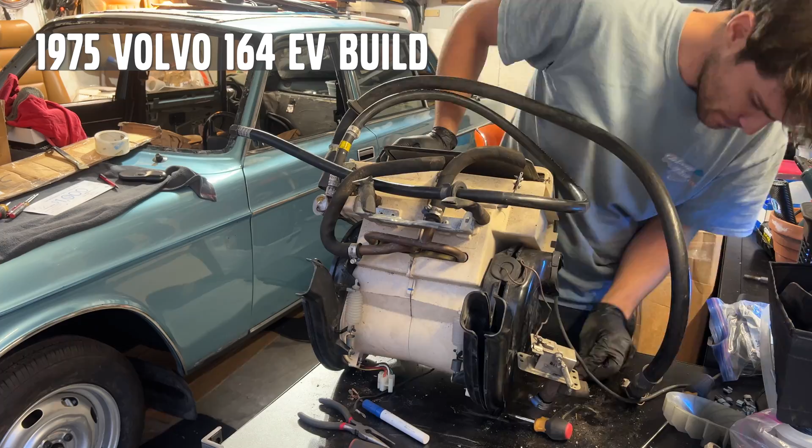Inside here is a wheel with a little washer on it. In the center of the washer is where the motor mounts, so you can push it to either side to get it to unmount. There are little nubs where the ends of this can fit, and it's flat, but it's gonna be under pressure when you press it down over the shaft of the motor. The important thing is to mark the shaft relative to the plastic wheel, just to make sure it stays in balance when you put it back, so you don't prematurely wear those bearings.

This is a big job. This heater whole thing just has to explode. Good luck. Look at that, 79 pieces. Ugh, and all these steps are like so easy.

Just right there, remove the heater unit assembly. And then a few notes on testing the blower: separate the blower motor housing halves, remove the blower motor. Sounds pretty straightforward, but then you're like, how exactly do I do that? So this is where trial and error comes into play.

The 240 housing is very similar to this, but I think the hoses for the heater core are actually on the other side, and people just cut it open and replace the heater core that way from the top of the dash. This doesn't give us that option.

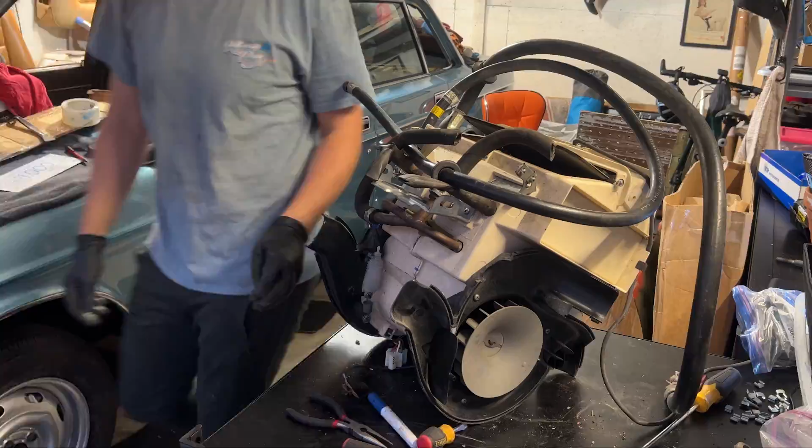Originally, my plan was to redesign this entire HVAC system. The biggest challenge to that would be this gasket at the bulkhead. It's largely rectangular, but the taper and everything. I feel good about reusing this, but I know it's going to be a bit of a journey figuring out how to put it all back together.

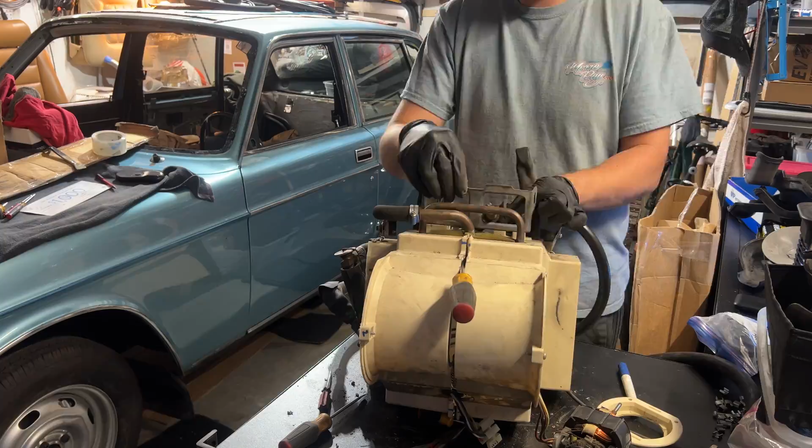Now that the halves are separated, this should, in theory, just come apart. And there's our heater core stuff here. Is it perhaps glued together a little bit? I can't tell you, I'm struggling to figure this out. I think it's just glue.

There we go. All right, the magic of editing, it looks very easy, but I'll tell you, this was rough.

So there's our little motor. Sounds pretty good, a little squeaky, but the bearings don't have any wiggle in them, which is awesome. That means we can oil it, check our brushes, which are looking pretty clean, and end up putting that motor back in.

Cool beans, this is what I'm after today: this lovely heater core. We're gonna take measurements of this. It's going to go in the computer, and the computer will tell us what size electric heater core to purchase.

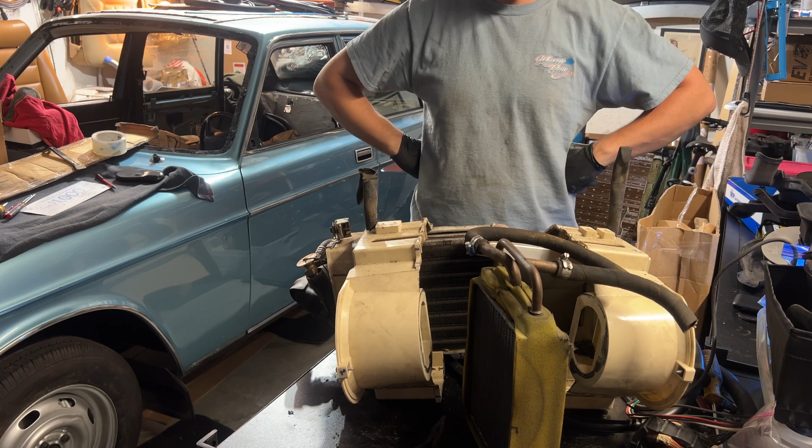An electric heater core is not gonna get too hot. Yeah, it's 1500 watts, which is the same power as my heat gun, but I think with the fan blowing, it should be about the same. We're gonna target the same temperature as whatever the heater core gets to be, that way we're not overheating this entire assembly, because I would love to have a more or less Volvo functioning setup, where you can just turn on the heater and it'll trigger through the switch the electric heater.

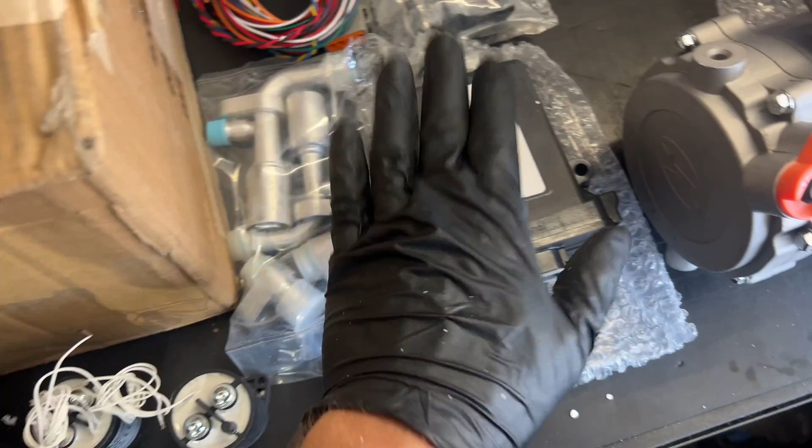This is where one of the ports will go. We have our adapters here so we can get these fittings made and compressed. Very nice, it does come with its own control module. The good news about that is this will be going to our high voltage system, which is exactly what we want. I gotta confirm. The other thing that arrived today is our tiny little heaters.

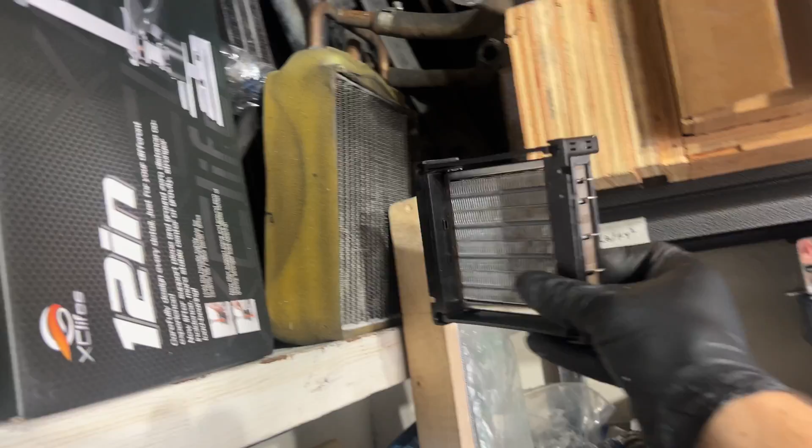Look at these guys, about the size of my hand really. So let's compare this to the Volvo heater core. Gosh, it looks like we could almost fit 4 of these in place of our heater core, but we're essentially going to do one and two like that. Bada boom, it should roughly be the same size.

We might need to cut a little bit around and then create some sort of mounting brackets for these. I like that they have a plastic enclosure because that tells me they're not gonna melt themselves, because boy, do they get hot. 1500 watts these things are gonna be running.

So I sent the second motor out to get that modification made. They're doing like a 5/8 drill up the input shaft to make it fit the Volvo input shaft. And they said they've never had this much trouble with couplers before, but sometimes zeros and ones get flipped. Decimal point is in the wrong spot.

And measurements are not an exact science. Human error is not an exact science.

Okay, well, we've got tiny little baby contactors for these. The same kind of contactor arrived for the air conditioning compressor. I'm going to open up the second box, make sure all the parts are identical. And we have 2 high voltage compressors ready to go with our 120 volt system.

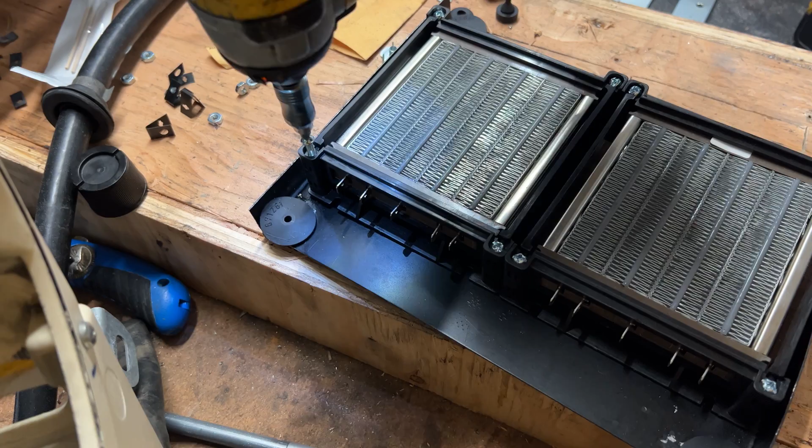Heating elements are secured. I have these little bumpers here on the bottom because there is a slope inside of this where the heater core would like to cinch up against the ends. We have 5 terminals on these, it just goes 1, 2, 3, 4, 5, 1, 2, 3, 4, 5. So it'll just be like heater core 1, heater core 2.

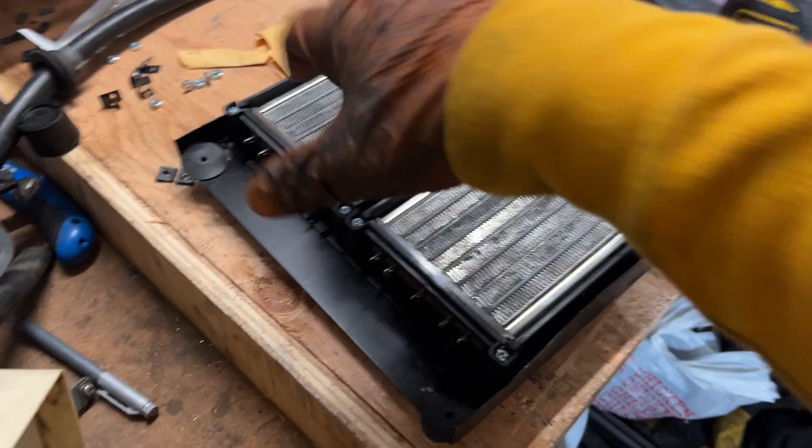AC compressor time, low side is 21.2 millimeters. Hey, didn't have to crack open the seal after all, because those guys popped off and the rubber stayed in. It's really held in with a lot of vacuum, so voila. Our top one here, the orange, was the high side, the low side was blue. A couple of things I'm noticing as I'm going over the kit, now that I've labeled the right ones, high and low, we've got 2 sets of fittings.

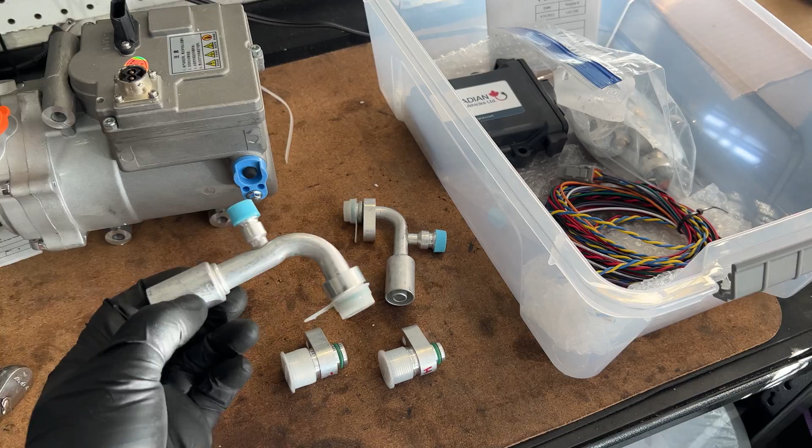This is a screw-on type. This looks like the old R12 style York compressors. And then this modern looking one, which I'll have to get pressed at a shop, like a machine or a hose fitting place.

And as we're back under the hood, there's a real order of operations to this, and I just can't work out of order. So I was getting pretty deep into the air conditioning stuff, and now I'm like, man, I can't really find out where to put the AC compressor.

I don't want to create mounts for it and then have it be in the way of the motor and battery box. We could very nicely mount the AC compressor over that side and the battery there. So I kind of want to keep that area clear, because I like how this looks, very nice and smooth with the fresh paint.

So this is going to be all wiring here. I want to have a minimalist appearance to this because we are trying to be artists as well as engineers on this project. And boy, it's tough.

So I'm going to start taking measurements for my fabricator, which is Soren. We still work together even though we're 800 miles apart. I'm going to send him the mock-up template of the mount, and then he will get to work welding out of some heavy gauge steel. In a minute, I'll take you inside and we'll talk air conditioning theory and setups, etc.

Pieces we're going to need. I'm going to show you now the clearance we have in the engine bay for the condenser, and we have to make space also for our cooler for the electric car. So it's like the radiator for the controller system.

The cooler we're going to be using for the electric components is the Derale Performance Electra-Cool Remote Cooler 15800. The specs here are not correct, the dimensions are different than this, but that's close.

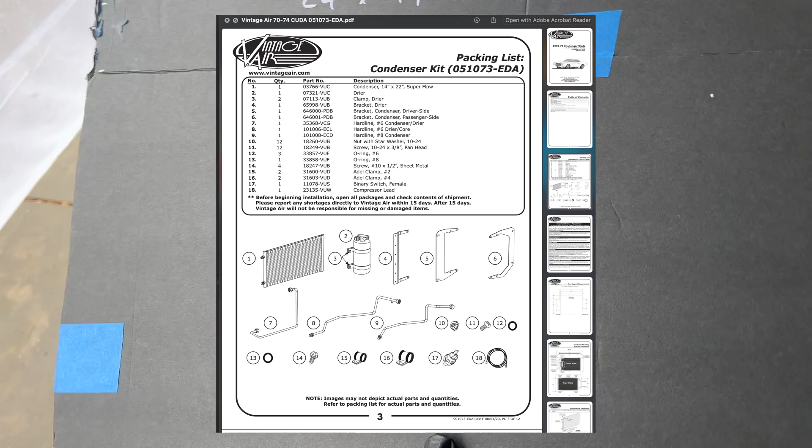As I'm shopping for condensers, I looked through maybe 60 of them, and the kits from a condenser on its own for like any sort of 60s car that already exists is pretty cheap, 60, 70 bucks. But the kits are what I'm looking for, and the kit is stuff like Vintage Air, where they'll have a condenser and it's black, so it actually hides behind the grill better than the silver ones. And those are mostly 2 sizes, like 24 by 14 or 22 by 14. There's a few 12-inch ones, and there's even like a few 20 by 12, which I think is like universal application, but this is like the most common size.

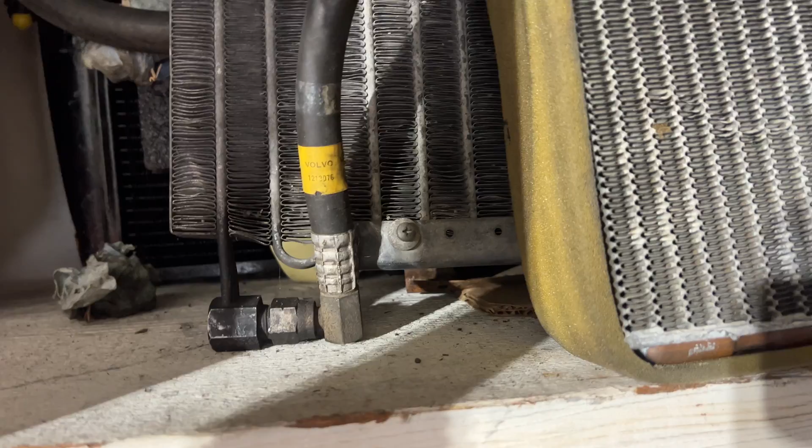The original Volvo condenser in the front there, it's 24.5 inches wide, which is exactly the end of the mount to the end of the mount, and it comes all the way to the end there. A lot of the condensers online, the measurements don't include the fittings, they're just the body of the condenser, so we got to keep that into account.

It's 12 inches in height, so I was trying to match something like that. The Mustang gets close, but it's still 14 inches in height.

The radiator sits behind the condenser there, and also behind it in the engine bay, closer to the engine. 23.5 inches is the body width, but then there's the ends, which are like 1.5 inches each. The total width of the radiator mount, bolt to bolt, is 27 inches.

And the height of the radiator is about 18 inches, but it sits 1 inch higher than the cowl. If we went all the way to 18 inches, we'd be about as high as this P-clamp. This P-clamp has a different name as well - an Adel clamp, I think they call them. I learned that last night.

Anyway, the opening of this mouth is 24.5 inches, that's that wall there with the 2 screw holes. There's 1 screw hole and 2, all the way to this screw hole - 24.5 inches, the same as our condenser size. Of course, it's made to fit.

And the opening is 14 inches high, and that's from these bolts down here all the way up to the latch. But 14 inches is really butting up against the latch, so if we put something in that's 14 inches, it's going to be crushed by the force of our latch pushing into the spring. So we want to keep clear of that.

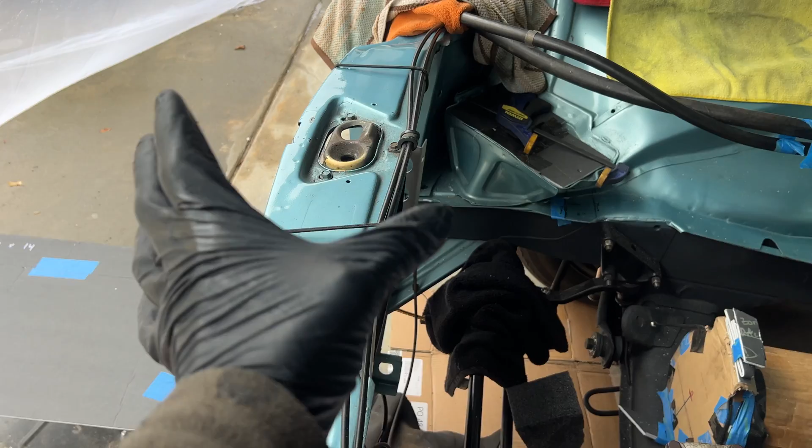A lot of American cars are big cars, so they have the latch really far forward, and there's a lot of space for condensers to be added. But Volvo made it compact and they fit it, so the good news is we don't have to redesign and keep the radiator, because there's this 4-inch notch that's cut out here on the frame rail, and cut out here along the lip of the frame rail. That will give us the room that we need to mount our 24 by 14.

Lately, my life has just been this: measuring, drawing, measuring, drawing, measuring, drawing. At some point, I'll go upstairs and get more paper, but 24 by 14.

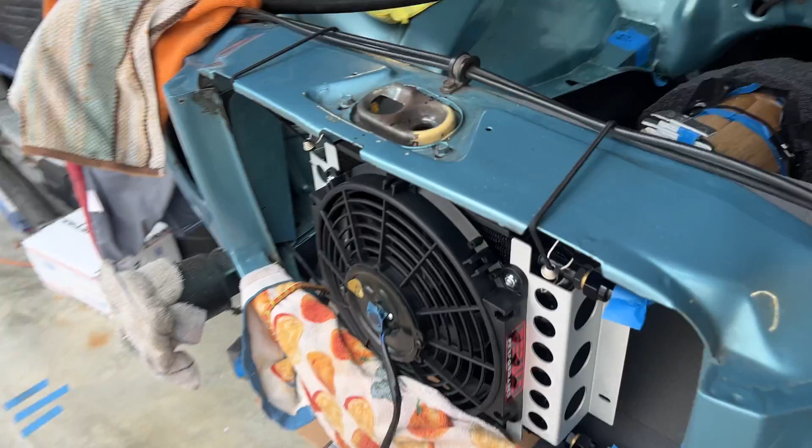The condensers, most of them are about 0.86 inches thick, so they're not that thick, which is really great. Very slim, very compact, and instead of being the old tube and fin like this one, where it's just a single tube that runs, and then it zigzags up and back down and back up, it's a more modern parallel flow type. I don't know if this one here is the same thing. I hope I'm getting all my facts right.

And as such, they need to be mounted completely vertical. So our EV controller cooler is kind of where I think it's gonna be now, which is on the inside of the mouth, because our larger condenser can fit right where the radiator wants to take place. And I'm hoping to find a kit that has the brackets mounting to the sides, because a lot of them will mount top to bottom, and that's fine too.

We've got those 2 bolts at the bottom. And we could mount into the top, but I don't want to share any holes or create new holes with the latch, because I need to keep the adjustability on that. Really, the best option is to do side mounts and maybe a bottom one if we need to, but the side ones should be adequate.

And then I'll have to bracket this guy differently as well. But from here, 24 by 14 fits. We have a half inch to spare on either side, and the height, it can go all the way down until we hit the brake line. So you can see the bottom mount for the radiator down there is essentially the 17-inch mark from there to the top. So we've actually got plenty of space for a 24 by 14, which is really awesome.

The next thing to do is bracket it, because a lot of the kits that they sell, the brackets come and they attach to the top screws. There's very few that have side screw holes - they're all top and bottom screw holes. So I'm gonna have to keep it a little bit lower like this to make room for the brackets, but I'm feeling pretty optimistic about that.

Now the next thing to do is the fittings. The ends of our condenser will have these 2 - it's like an 8 and a number 6 AC line. It'll be top and bottom, and they're gonna have hard lines or soft lines that'll come out, wrap around. So we want to keep this a little bit over to that side to give room for the lines.

Or another option, but I don't really want to do this - there's a smaller brace on this side. You see there's a hole there and here for the AC lines. On the Volvo condenser, those holes don't exist on that side.

And these holes could be used to get access in here and then drilled out to this side. But I don't want to have to do that, because I'd really like to put the receiver dryer right up here against the condenser. That'll also be out of the way of the battery box, but it's going to be nice and compact. A lot of the vintage air systems have the AC dryer sitting on the front side of the condenser, so if I can pivot some of those hard lines, or maybe even bend them if I have to, we can get it to mount on this side.

So right now the Mustang kit is looking pretty good - 64.5 to 66, all the way up to 69. One or two lines changed, but the bracketry is the same, and the condenser is the size we want. If I have an option for a 22 by 14, I'll do that as well - it'll have a little more wiggle room and space to get the lines to clear as we wish.

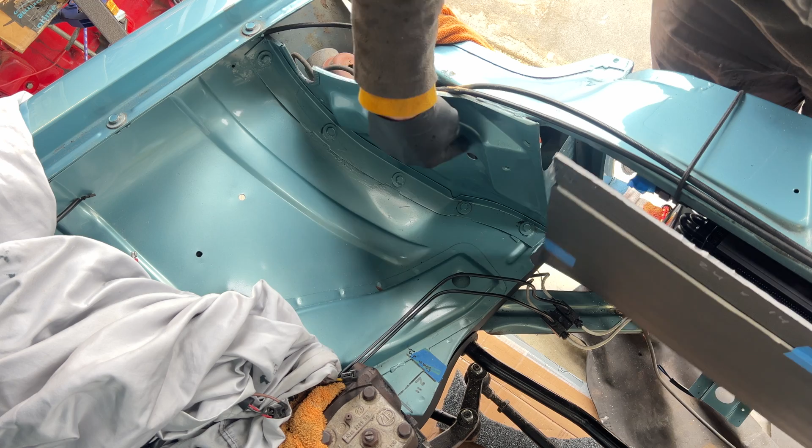This is the space where the power steering reservoir curve is, and this was the curve that held the coolant overflow tank. But it's also a really good spot to mount our AC compressor, and it'll keep it nicely out of the way like that. Now this has a bracket - it's in the mail - but it's going to attach here, the high and low sides, and if we can curve all the hoses correctly, it should be a nice short distance to all our AC parts for the condenser and the receiver.

The important thing is to keep the compressor vertical. That's the way it's designed, and that's the way the oil functions in it.

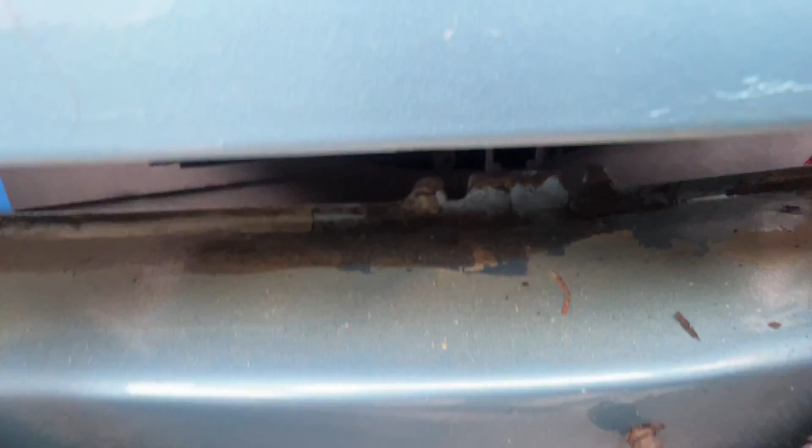The grille's not terribly big, and they shrunk the front of the late year 164s versus the early ones. So you can see this bar that was added. This bar - the bumper is going to sit up here - and then the bar is for the smaller plastic grilles versus the larger metal grilles. But the larger metal grille bar still has the attachment point down here - see those two? Anyway, that's kind of our centering point now.

But if we put this in here, it might sit a little higher, but not too high that it gets in the way of the latch there. This is going to be a pretty good spot to cool our fan. But I can also get it through this side and out through the air hole on that end. This is the breathing spot for the D-Jet system in the B30's intake, but that will require a little more cutting on that side.

So I'm going to start with plan A. It'd be kind of fun to keep all our components on one side and leave this part of the engine bay nice and clean. But I don't want it to be too one-sided or too heavy on this end visually - but sometimes you just work with what you've got.

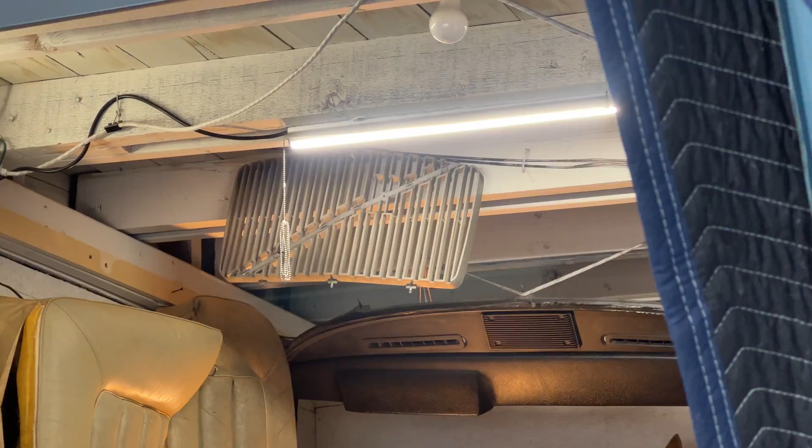There's our grille, the plastic grille. This isn't the exact one we're going to use, but it's one of them. There's our TE grille - you see it's got 3 plastic nipples at the bottom, and it's got the 3 screws up top.

So it's going to sit about as far as this plane here, which means this is going to push in just a little bit. With the curvature of the grille, this will get close but should be just clear of everything. Plus, our condenser is going to need its own set of fans on the backside, so we'll have a total of like 3 fans working this whole setup - that's going to be a big deal.

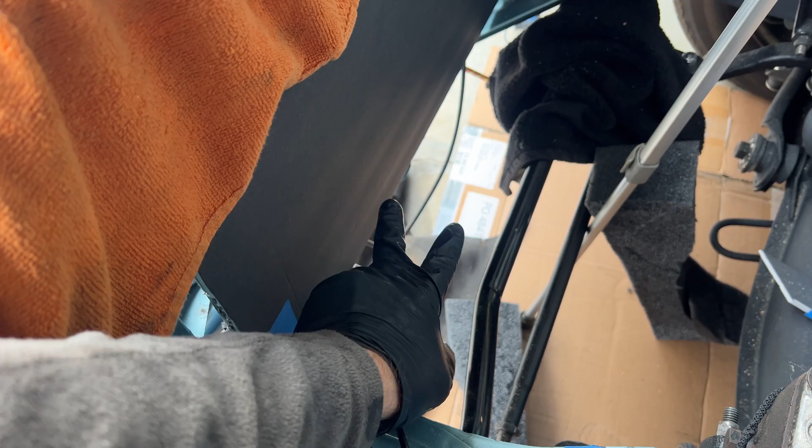But whatever we get, we want them to be small because we only have about 4.5 inches from this top part of the cowl, or the radiator support, to the battery box. So we'll be putting in some slimline fans, and we'll also have a little more space at the bottom. If this wasn't going to fit, we could also slightly tilt the condenser, since the battery box is slightly tilted - but I don't think that's going to be the case here. The Corvettes had tilted condensers and they looked pretty cool doing it.

So as I was describing here, I went through 6 pages, 150 different kits, and I checked every dimension.

I'm really grateful that we have access to parts like this. Vintage Air is amazing because they carry all these great custom components, but their website leaves a little bit to be desired. Clicking on Mustang and trying to find the condenser kit just gives you part numbers for full kits, and none of these are actually links that you can click.

If you copy paste the number or just use their search bar and type in Mustang, you've got all the options here: shrouds, hoses, etc., but full kits as well. For about 315 bucks, you get a full Mustang kit, and the nice thing is you get full detailed instructions covering every part, its number, and its dimensions. Here we have the condenser, 14 by 20, which gives us 4 inches extra room.

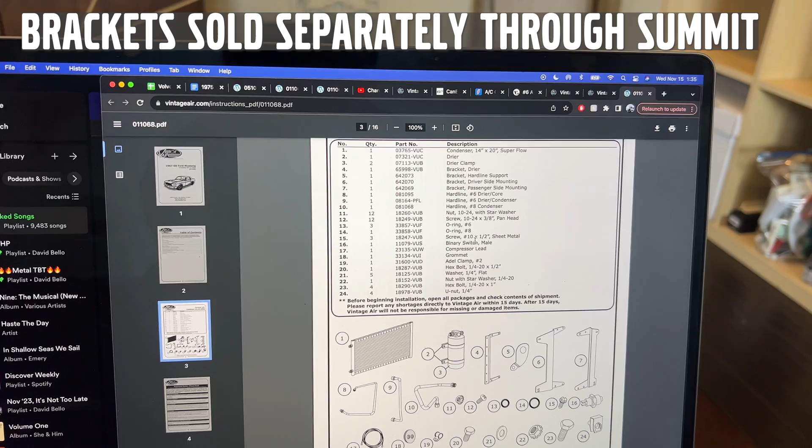You can come down here and look at the bracketry they have. I don't think they'll sell you the brackets individually unless you call and do a direct order, like if you damaged something from a kit, but it's nice to know it's all documented here.

The condenser changed very little between the Mustang years, but some other important dimensions here: they're showing a 24-inch opening. That's what we have, 24 and a half, and 21 and a half for the mounting holes.

Some views once the things are installed, so we can get creative with the brackets because this is coming out. This is the rear view. I like that one. But sometimes it's reversed and it comes out the passenger side, and the diagrams are very useful here.

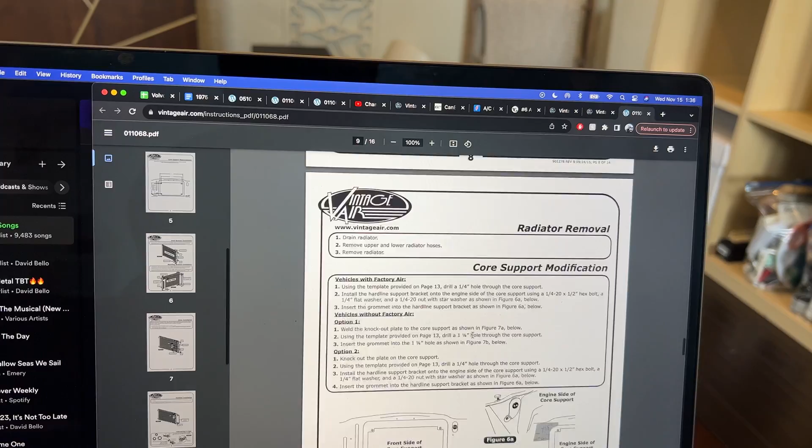So I went through a couple of notes as I was shopping through 150 different kits, checking the measurements on each one and going through the diagrams, coming up with my favorite 15 options. We have everything from Chevy pickups, Corvettes, Barracudas—mostly Mustangs made the list because they're 14 by 20. Some are 16 by 18, but 14 by 22 is what I think I want to go with, which is the Barracuda.

339 bucks. So when I found it here on Summit, I would just Google this, and that brought me over to Vintage Air's direct link for the product. There I could get some of the instructions, plus figure out their MSRP to see if there's a better price available. The Cuda has a condenser that is 14 by 22.

I like that because one of the other beautiful things is not all diagrams are the same. They don't all include this engine diagram, and sometimes they have more or less realistic photos. But here, the important thing is they're including this: the binary, sometimes trinary if you're using an electric fan, safety switch.

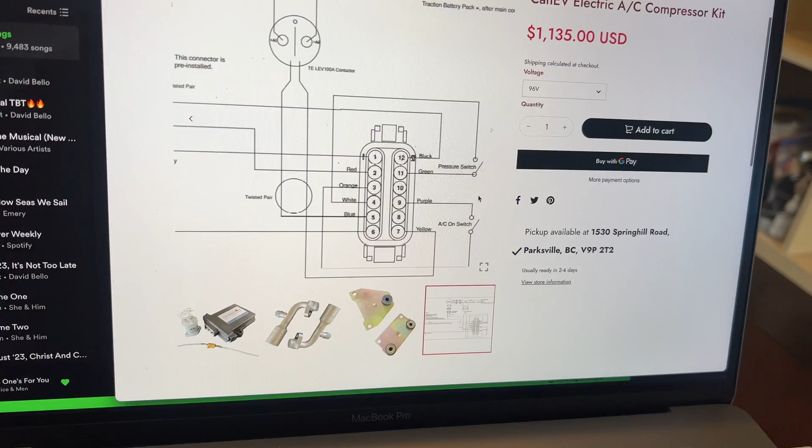So you see an entire brain box for an AC compressor. It means this fella here is not gonna fry itself if it's empty, but there is also room here for the AC on switch and a pressure switch, so we want to make sure to have those safety systems in place.

I looked through the green book and found the air conditioning stuff. You can see our system is pretty straightforward. The giant York compressor has 2 lines coming out of the evaporator; they go into the compressor, one at the top, and then from the bottom of here into the dryer into the evaporator. Our system uses a thermostatic expansion valve, which regulates how much refrigerant enters.

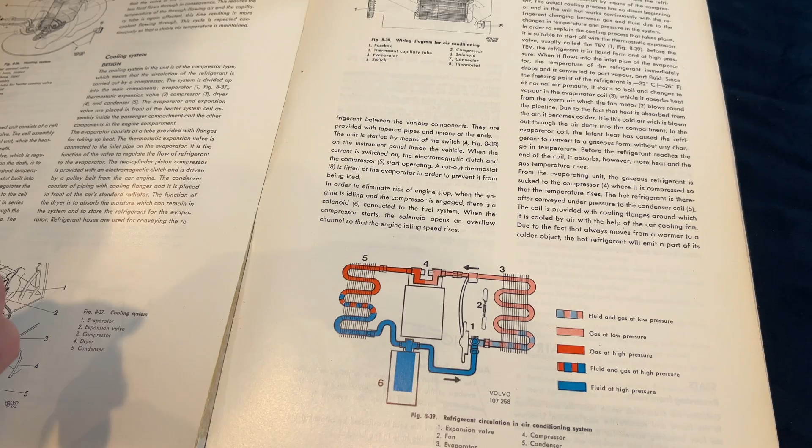The refrigerant, which is icy cold as it leaves the dryer and goes back in, is both at high pressure and a mixture of fluid and gas. The dryer stores refrigerant and absorbs moisture in the system in case there's any water in there. The thermostatic expansion valve prevents the evaporator inside the car from freezing or icing over, which can happen especially in a humid climate. This thing can run to like negative 32 degrees because AC refrigerant R134A has a pretty efficient operating temperature, meaning it's very good at cooling.

So we need something to regulate the system. The TX valve is the way to go. Green book here is very useful for describing the operation of each of these components. I read through it, but sometimes the way I memorize best is just by drawing it out myself. And here I have the opportunity to add a few things as well. More or less the same diagram.

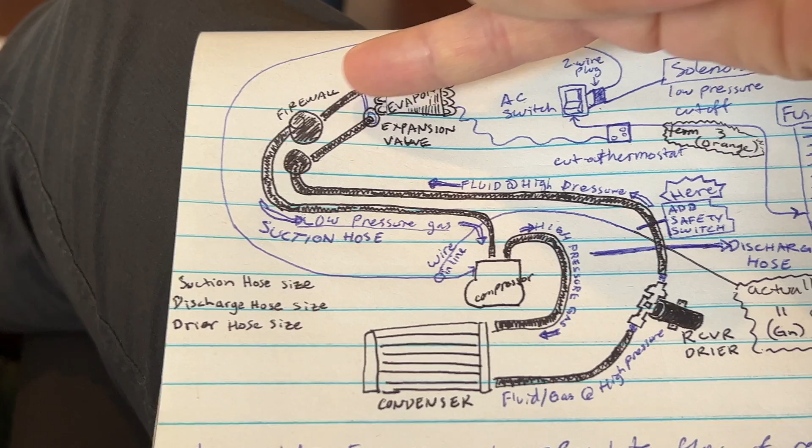Our evaporator has 2 hoses on the firewall. The expansion valve comes out from the bottom side. The suction hose, also known as the low pressure gas line, is the bigger radius hose, and that one, I don't know exactly what size it is, but that one goes straight to the compressor, and from there it compresses the low pressure gas into high pressure gas. And as it's compressed into that, it's going to increase the temperature, which means it needs to be cooled down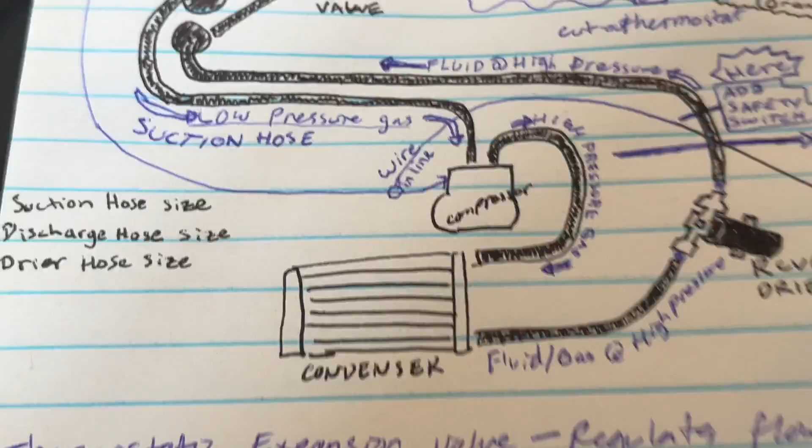by the condenser. As it's cooled by the condenser, remember, it's just zigzagging through these veins in the condenser, starting at the top and working its way down to the bottom hose, and then that is high pressure fluid and gas, which ends up in the receiver dryer, which was mounted here on the fender well. There is a safety switch that should be added here after the receiver dryer, or in the receiver dryer, which is one of the beautiful things about the kits that come with Vintage Air. That pressure switch lets the system keep going, but from there, the fluid at high pressure will go into the expansion valve and into the evaporator, where it will then be blown through the cabin and cooled.

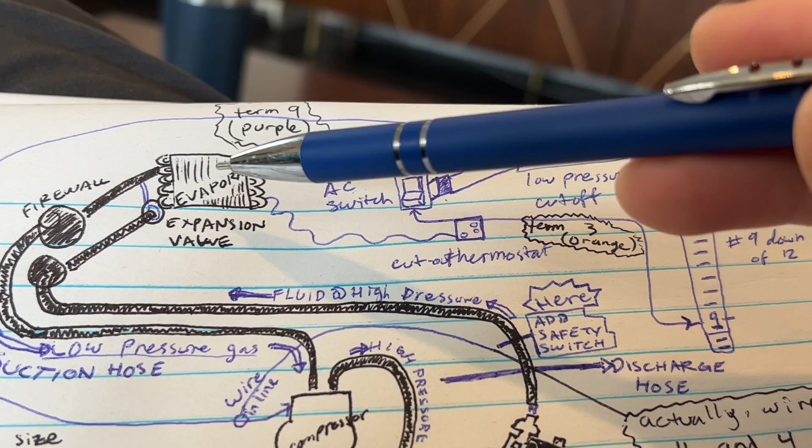So the way that the system regulates itself is a cutout thermostat, which is the little knob inside the dashboard, and it's got a little squiggly capillary tube, which is in here. It inserts itself in through the fins of the evaporator, so it takes a measurement there, and it tells the switch, here's how much we should cycle on. If your compressor is staying on the whole time, the switch here is set too low and it's not letting it cool enough. If it's working a little bit and then it stops, it's probably set too high, which means it's freezing itself over. So I never really understood how to use these, but sometimes they work too well, and sometimes I imagine this thermostat or this capillary tube gets broken.

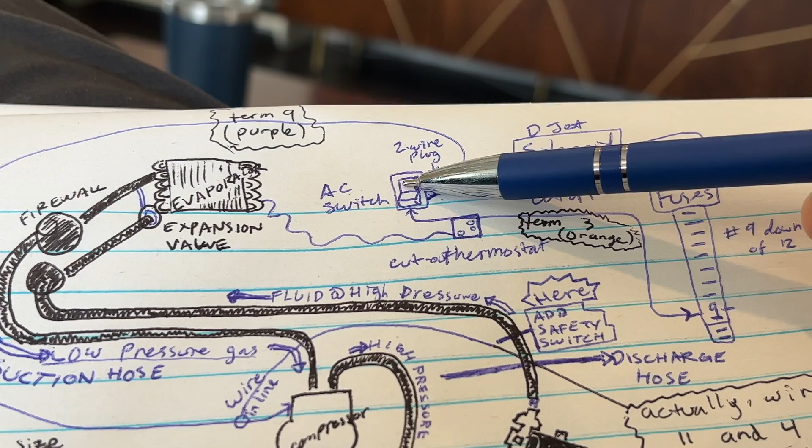This is the big blue switch inside the car that lights up with the nice little snowflake symbol, if we can find one that still has that symbol on it. From there, there's a couple of wires. The one wire there ran to the compressor. The second wire here was a D-jet solenoid, which just told the engine to up the airflow a little bit so that it doesn't idle lower or die when you have the extra load of a compressor, which is belt driven.

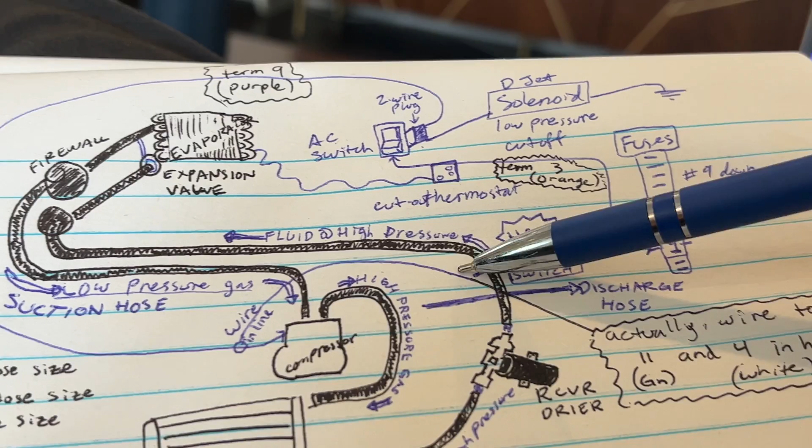Ours is electric, so our wiring is going to be a little bit different. Instead of going from fuse 9 on the Volvo fuse block, we're going to end up connecting this to a terminal 3, and then the outside of our AC switch here, we will wire that. Instead of going right to the compressor, we're going to wire that into terminals 4 and 11, because those are on the controller, a separate controller for our compressor.

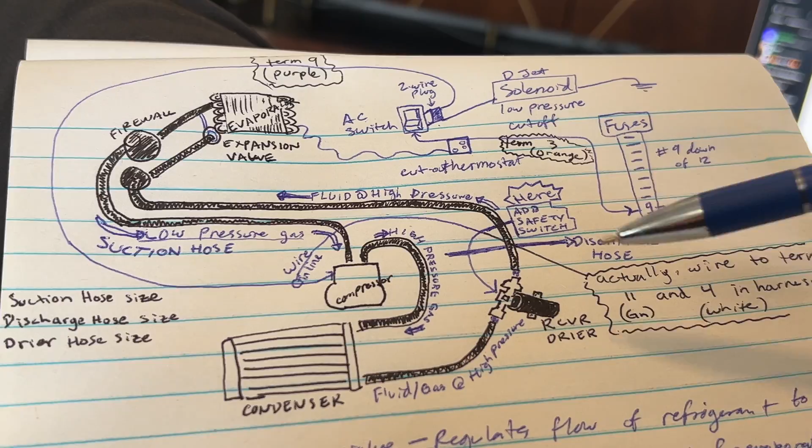Next thing to do is to figure out our hose sizes. So a lot of the hoses are standardized in like every kit that I've seen from Vintage Air. So they have adapters for certain things, but for the most part, I'm gonna just grab a kit. They use a binary switch for mechanical fans to just turn the compressor off. It's like an inline switch for the circuit. But if you have an electric fan, then the trinary switch, I think, also cuts off the signal to the fans in addition to the compressor.

I was a little concerned about how the Canadian EV wiring was going to be. This plug goes to the brain box, and then these are the two high amperage leads that just activate the compressor, and they are going to be attached through that contactor as well as a pre-charge resistor. I think the pre-charge resistor smooths over the flow of electrical current between the two terminals of the contactor into the compressor, so it doesn't just immediately jolt it with 144 volts. It should let it ease into the power. I believe that's what it's for.

All right, another 5 hours of the computer, my eyeballs are gonna fall out, so I think we should wrap up the notes by saying I'm gonna place the order for the Barracuda kit.

It's kind of fun getting to say that the Volvo's got Cuda parts. But then I'll have an AC condenser that is 22 inches by 14, very efficient. We want an electric fan that'll cover 70% of that 308 square inches. If we get a 14-inch fan, the 14-inch fan will cover 154 inches, because we know that the surface area of a 14-inch circle is pi r squared, which is 154.

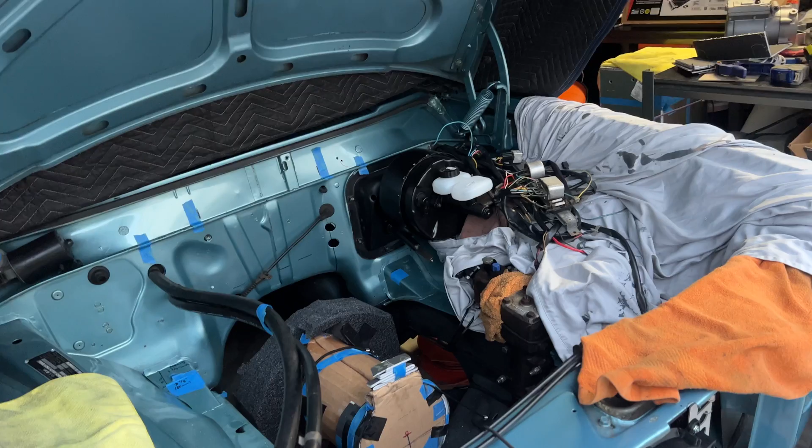Let's look here. I don't want to overcool it. Is that a problem? Is that an issue? No, I think the bigger consideration is noise, because we want our EV to be quiet. My biggest concern is, we're going to have a gearbox, and the gearbox has meshy, noisy gears. The oil helps quiet it down, but the EV's never going to be completely quiet. It won't be whisper quiet, and the fans will be a pretty noticeable noise, especially this one, which will run constantly with the electric car controller on. Thankfully, it has S-blades. S-blades are a little quieter than straight blades, so at least we have that.

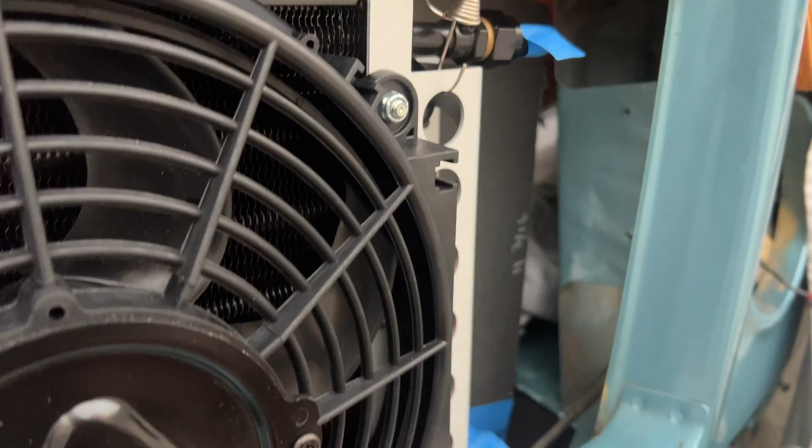But the last thing I want to say before we wrap up this portion is the receiver dryer will have to live here, because it's going to be a tight fit for everything. The receiver dryer is about 2.6 to 3 inches round. And I don't expect you to care about these numbers, but it's kind of my verbal diary, talking it out loud, since I'm just here by myself, having to figure it all out. I think that's all making sense to me.

A slim fan, Spal is a really nice brand. Their S-curved 14-inch fan is like 1 inch, and then it'll get up to 3.4 inches, but that 1 inch slim part matters, because we have the kill switch that's gonna live here, so we don't wanna bulk it up too much, which is why I would love the idea of pushing these as far forward as they can go. Didn't I say this would be a quick summary of my notes today? And here we are still plotting and planning. I'm theorizing quite a bit so that I don't have to buy and return several different things, but we're reaching that point where it's like, just buy something already. Let's go with the Barracuda kit. All right.

Good folks at Summit have provided us the parts here that we need for our air conditioning build. This is the front end of things: the condenser, the dryer, the brackets, etc. And this is a parallel flow Barracuda condenser. It's 14 by 22 inches. We weren't sure if that was the measurement with or without the fittings, because one of the diagrams showed the measurement ending here, the other one there, for the same part number.

These are the brackets here, the side bracket. Mounts the top and bottom like that, and that attaches our dryer. We have a trinary switch, which is a 3-port switch, and a couple of different bracket options because we're dealing with a custom application. So I've got flat ones, I've got fun angled ones, and then a few dryer clamps. Looks like our dryer came with clamps, and I ordered clamps, and I ordered more clamps. They're clamped out here. The lines, because they're custom, I thought maybe I could just bend them myself. I don't have to do the fitting work on this because it's just a solid hard line, and I'll make some U-shapes into it.

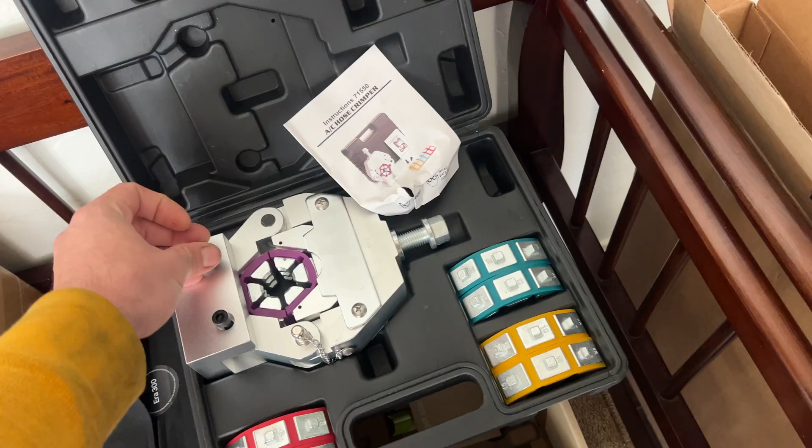Aluminum is easy to bend, and I think you do it cold. The rest of the lines, the rubber lines, are all gonna be made with, you guessed it, Master Cool, I think was the brand that created the 71550 AC hose crimper, and everybody else is copying them. So this is a knockoff brand, but the crimps are looking more or less like the originals. They've got the 3. When those hoses arrive, we'll check it out.

Now let's get to fitting. 22 inches wide, the fittings add another 1.5 inches. Maybe 2 once we get the second half in, but then a little bit more than 2 because we got to bend the pipe coming out of the other side of the fitting. So we're looking about 2 feet for our installation width. It's going to be perfect.

Day 2 of condenser mounting. It's getting closer. Oh, look at that fitment. I got room to spare in here. Very nice. Once that hardware is painted black, you won't see nothing. It's good to see the grill back on. It's been 1.5 years, so voila.

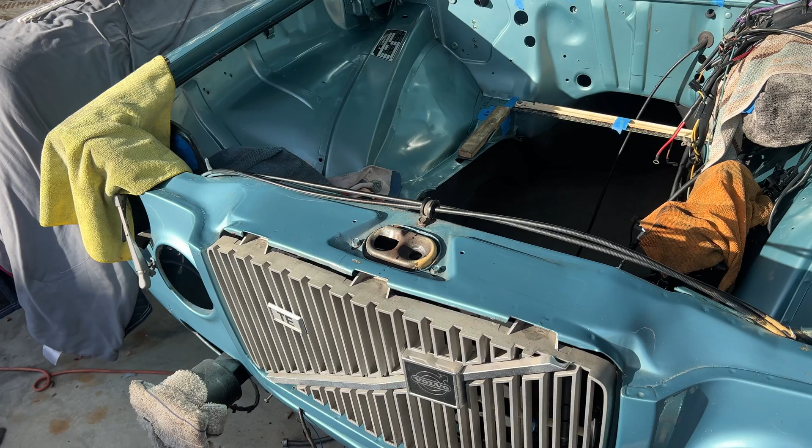The controller cooler is in enough to clear things. I had to move the condenser back 10 millimeters because things get bulky, but you just flip these little brackets here and you get your little adjustment. The problem with that is now my lines here don't quite go on the inside of that. Decisions. And finally the grill fits.

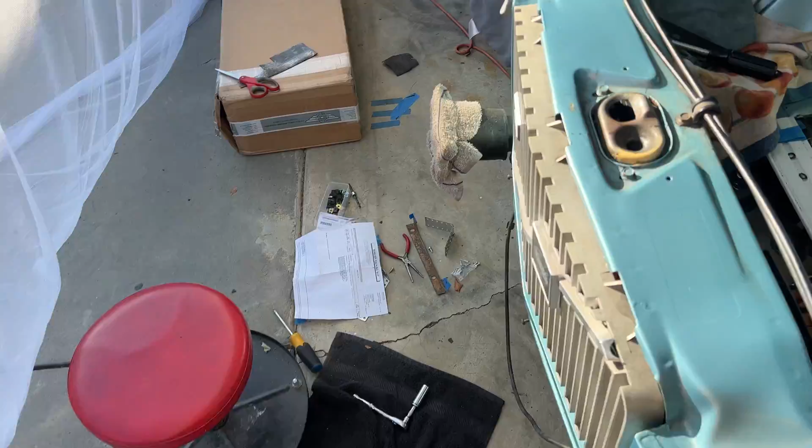There's 5 millimeters or so of clearance between the fan and the grill, which means we have enough to work with in the future. Working out the brackets. Clearance is tight here, clearance is tight on this. I'm gonna have to modify that bracket to fit it a little bit more. Just keep making things, bending aluminum. That's fun, because it likes to break fast. You only get one bend, no room for errors.

Good folks at Cold Hose have finally sent the order, and it is here. It is beautiful. We have grommets, we have a lot of good connectors and angles we can work with for our compressor, our evaporator, our condenser. Got a couple of trimmings that I did here on the bottom of the fan to get it to fit better, but I still want to move the bottom of the condenser in maybe another 3 or so millimeters.

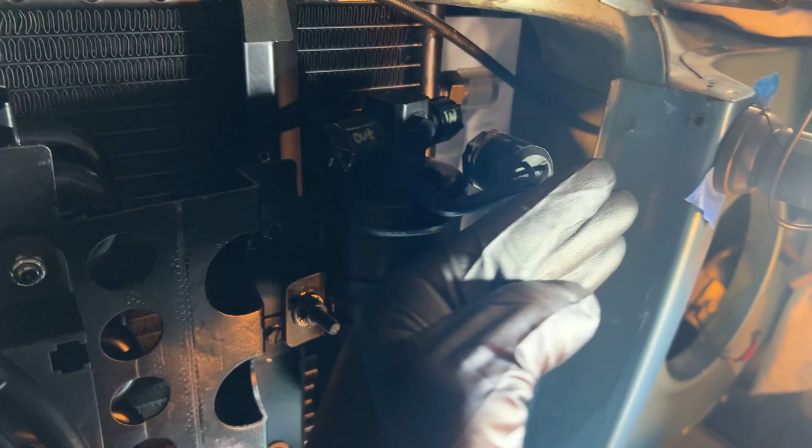Okay, installation is finished with the condenser and the cooler, and I'm just gonna wait on a few fittings. I ordered the elbows for these 2 guys so we can have everything fit nicely. There's even room for the switch here in the front. The grill comes up to about there, so we still have a 1/2 inch of room, which is really great. Try to get the wires to hide as good as possible. And now I'm gonna bend my first of the AC lines from the bottom here and loop it around into the inlet port there. And then we'll go out here and back into the car.

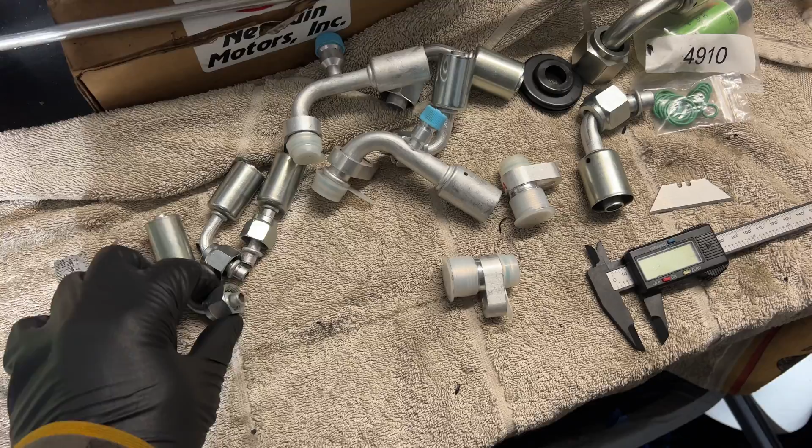But here's an issue I'm having with the AC stuff that I received today. We've got all of our hoses here, really great, size 6, 8, and 10. These hoses are great, the fittings, everything from our folks over at Cold Hose, really nice. But it's the fittings that we got from the Canadian EV that don't make any sense. Like the insides are the same, but the outside diameters are all wrong. So it won't fit any of our hoses. It's like, you can't squeeze a rubber hose to fit, 0.2 inches difference. Like that's a lot of squeezing.

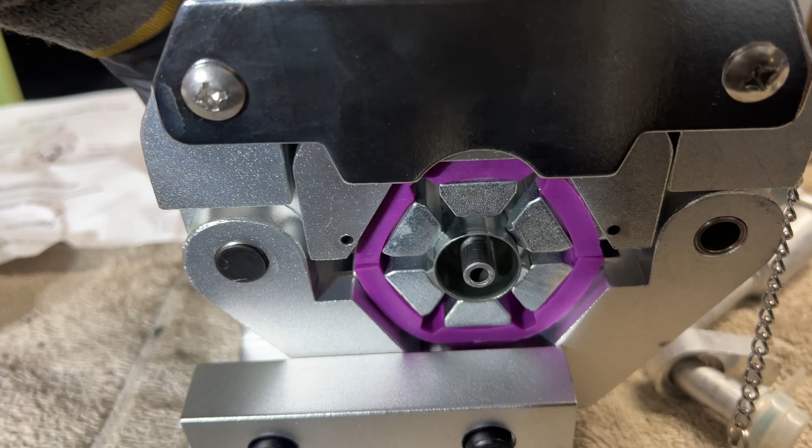But what I can do in the meantime, take this filler and my 5/16, 3/8 fitting for the pipe bender. And we'll see if we can make some bends happen. Here's our crimper. We're gonna attach a number 6 to it. We do the 90 degree, and it's gonna go inside of here. Start chomping at the bit, put this in the vise, and it should squeeze this down to make a perfect factory looking crimp. Fingers crossed.

I was nervous, but the crimp looks okay. It wasn't very even during the clamping process, but it looks like it's made pretty good contact all around. So we're gonna go ahead and put this in and try it.

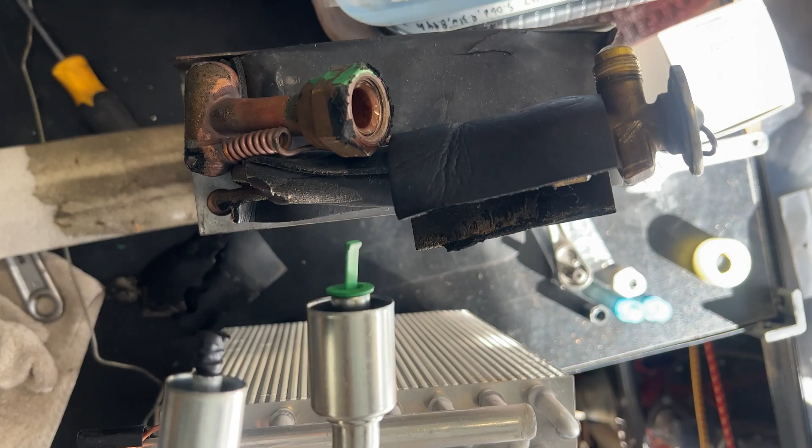A few days later, the evaporator core has arrived. The new unit here is from a 240, and because this car uses the same interior heater box design from 1973 to 1993, this is a really nice fitment that we have because everything's more or less dimensionally the same. So we have the same kind of design with the tubes, looping back and forth with the cooling fins.

So we'll transfer this over to it. The fittings are the important difference, because the original one uses flare fittings with copper washers. Those are fine, but they're non-standard with all the new stuff, so I wanted to standardize the entire system rather than having a mishmash of adapters.

Hopefully when this comes out of the heater box in the car, we'll have a 90-degree fitting here which will send it out through the firewall. This is the attachment for the thermostatic expansion valve, which is a pretty universal part. Here are the nice new O-ring fittings for it, but it's part number 38607.

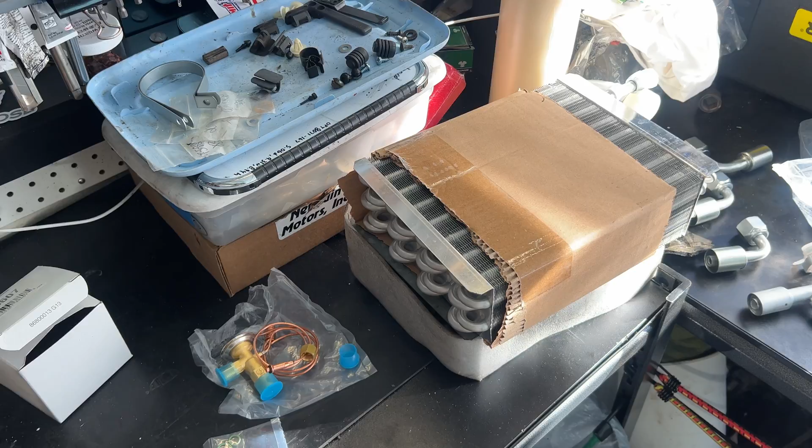This is from Four Seasons. The heater core itself is also Four Seasons. On Rock Auto it was like $100 or something, which is great. I think it looks aluminum, but it might just be plated copper. TBD, I don't want to start figuring it out by scratching it, but this is more or less going to mount the same way here.

You'll notice that the other thermostatic expansion valve, while it's in there, the second portion needs to get put all the way down here. I'll take the clamp from it so we can clamp the spring onto the inlet side, or that might be the outlet side. Yeah, this is the suction line, and that helps regulate the temperature of the expansion through this tube here.

And then you want to wrap the whole thing, but you don't want to wrap the top of it here. So you kind of want to just have it wrapped up to the bottom fitting like that.

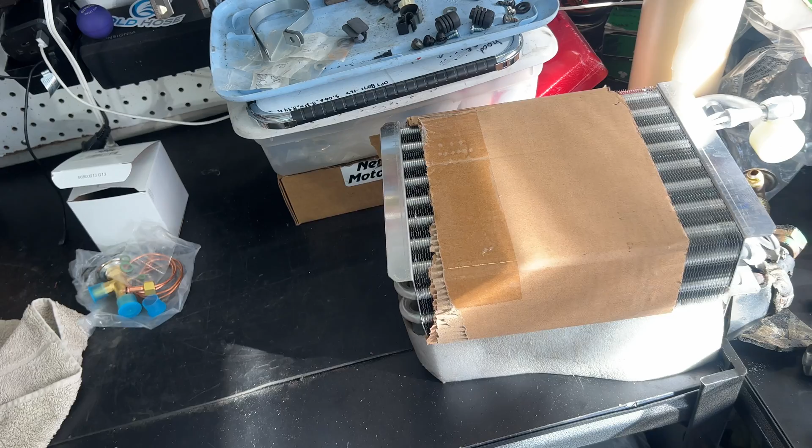Cool. The biggest help for this entire system has been Dave Barton's website, which I think is 240 Turbo, linked through Prancing Moose. He had all of the part numbers for everything that we've got ahead of us.

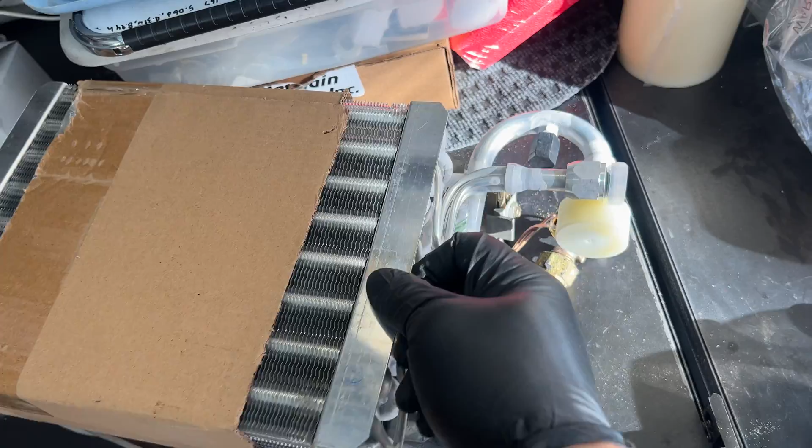This fitting, however, is gigantic, and because our line—let's see, are you vacuum sealed? Yes. Okay, might be vacuum sealed or it might be pressurized with nitrogen gas. Those are two options for some of these new parts, but having a giant fitting there, we've got our adapter for it. It's a number 12.

I did some more research and found out there's a reduced barrier type hose, which is thinner than the old thick-boy AC lines. Reduced barrier is 0.2 inches thinner, which means this is going to be like a 0.797 inch outside diameter hose or something like that.

I already ordered the hose and the new fitting, so we'll have 2 reduced barrier hoses and 1 will be a solid line. I capped everything so it wasn't letting oxygen in through those lines, or any atmospheric condensation that can happen through the cold metal.

As the sun sets, it gets pretty damp out here.

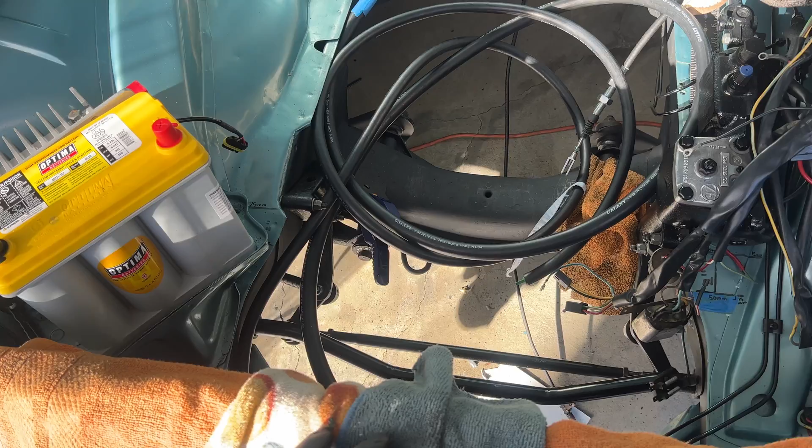I boiled some water and got the old putty that was on here, and I'm reworking it, sticking it in between the vanes, wrapping all the lines that we need to wrap, and then we'll do the tape as the last bit.

But the boiled water was also an opportunity to heat up my new gaskets for the headlight fog lights, because they were no longer available. I found some 4.5 inch really thick rubber ones used in farm tractors, but these are about 5 1/4 inch, so I figured they'll stretch, but I want to warm them up first to make it easier on my hands. It's thick though, but two birds here.

Keep packing this in, try to get all these copper lines exposed. I drilled through it to get the line that runs the temperature probe, which is for the driver controls, and poked it all the way through.

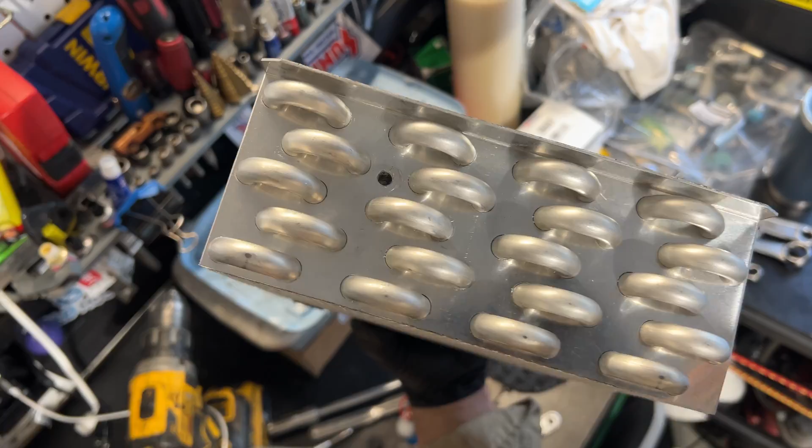Felt really nervous doing that, but we got it. It wouldn't go all the way through because one of the skewers started going this way and the bottom side started going that way. It's really sensitive in there with all these pipes.

So couldn't match the original one exactly, but if we looped it enough and still got it into the middle, I feel like we'll have some temperature control versus the Volvo method, which is run it all the way through, then back up and then down, spacing at 60 millimeters from the ends back into the middle. But we still have the same amount of line being contacted, just nicely packed with the goop.

Also kept these a little loose so that I could reverse the direction of our TX valve and this guy into the firewall.

I thought this was the way it was mounted, but actually the brackets are set up for the opposite end on this 240 style. So instead of the pipes running up to the top, which is what the 240 wanted, they're now running down into the footwell a little bit, but it should clear the passengers' feet.

Anyway, back to the switch for our heater. I pulled the knob off and got a brand new 240 switch for the headlights, since it's more or less the same shape—it's 1215169, 1975 to 1985, without daytime running lights. It's got 5 pins on the back: 30, 15, 56, 58, and S. I did a full pinout of these, and I'll tell you right now, 30 and 58 can be our low, and 30 and 56 will be our high.

The next thing I need to do is create a circuit that essentially uses this switch as a relay to trigger the contactors.

Now that we have our low and high side circuits, we can wire them to our contactor, but we want it to only be on if the fan is on, because if the heater element turns on and there's no air blowing through it, all it's going to do is heat up the plastic up here, and that could be bad news for our Volvo housing. It's like a plasticky fiberglass, but at some point it will melt if these two heater cores are just sitting there toasting the entire thing with no airflow moving through it.

So in theory, you'll be able to turn the heater on, but without the fan switch in any position, it won't do anything. It's possible that 2 won't be enough, and then I can adjust the wiring later, but right now my gut's telling me to do low heater with speeds 1 and 2, and high on 3.

On the original heater, there's just a coolant control valve attached to a wire, and as you move that position, it opens and closes the valve and regulates the flow of coolant through it. We're not using any of that since we've all gone electric.

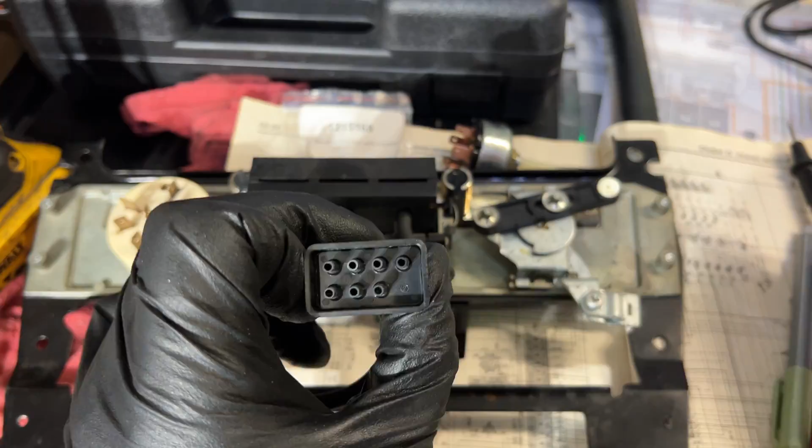And these are, of course, the vacuum controls. If you get confused, all the Haynes manuals and 240turbo.com for the AC and HVAC stuff have a really nice write-up with all the pictures of where these things go.

For my next trick, I'm going to have to take the display, which is one of these pieces I got from a junkyard car. It's essentially a solid piece of green plastic that's chrome painted on the outside, and certain parts of it are exposed to allow the green light to shine through.

Sometimes you make it many years without a certain tool, and then when you get the tool, you're thinking, oh, I should have bought this a decade ago. I need a power probe, but I've been connecting things to the battery and fusing them independently, so hopefully this is the last time I gotta do it. It's been 1.5 years since there's been any power to this car, and I'm finally putting some electricity to a circuit, so I wanted to make the milestone message.

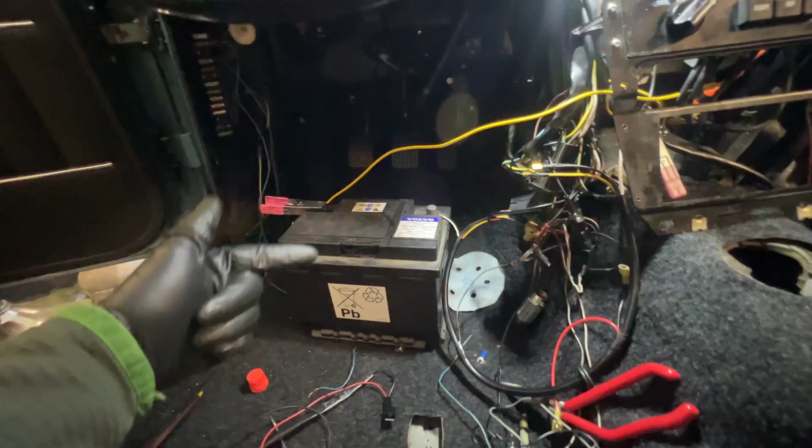12-volt battery, original battery, got our power and ground to it, it's clamped, and we are checking the fan. First of all, nice and balanced, but I wanted to see the pin out for the switch here. And we did a pin out with that, that's healthy.

I've done a pin out on the switch so I know what pins have continuity in the different positions, but I think the easiest way to connect this to our heaters is just run a small wire from any of the 16 and 18 gauge wires that come off of the fan switch and tee off into this little guy. It's a little trigger, and this thing's gonna use a fraction of the electricity. I don't want to rob too much power from the fan, but we want just enough to trigger this little baby to get the electric heaters to turn on with our relative fan speeds.

Here we have a contactor, $46.75 a piece. Nice, and it's got all of our necessary information. Must operate voltage 8, must release voltage 1.2, so between 8 and 1.2 it will hold if it's already established contact. Operate time 25 milliseconds, release time 10. Coil current 461 milliamps, so it's very little taken from the blower motor, less than half of an amp. Coil power 5.5 watts and resistance 260 ohm. Very useful. And if you're wondering what 260 ohm looks like, it's kind of like this right here.

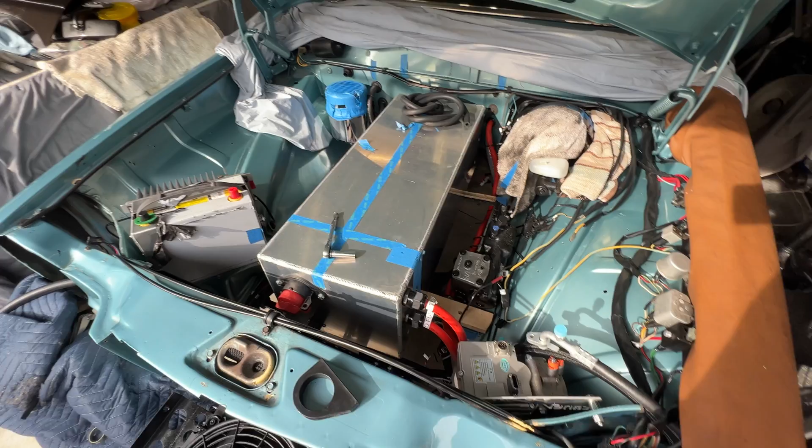It's time for a little check-in now that the sun's out. Briefly, we have our AC lines finished up and the AC compressor is installed.

Here it is. I'm gonna wait to do the final bolting up of these guys until I have the vacuum pump ready, because once you open this up, any sort of atmospheric condensation or just humidity in the air is gonna start to affect the compressor. So we're gonna want to pull vacuum immediately.

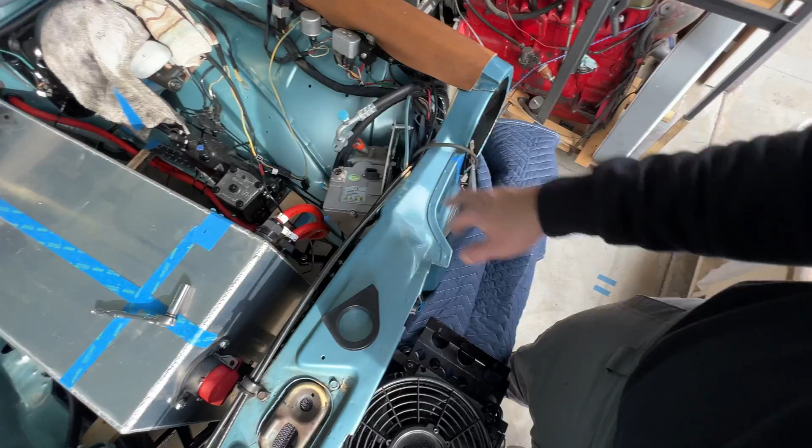We'll do all that in one day, and hopefully, fingers crossed, the rest of my connections are pretty solid and tight. Look at these crimps. These were the crimps that I was using my manual crimper on, and it started to cross thread a little bit on me, or strip or something. It made a noise, and then it started to be hard to turn. So I think it doesn't have much more in it, but it was enough for one car. The thing is like 130 bucks, and it saves you the cost of going to a shop.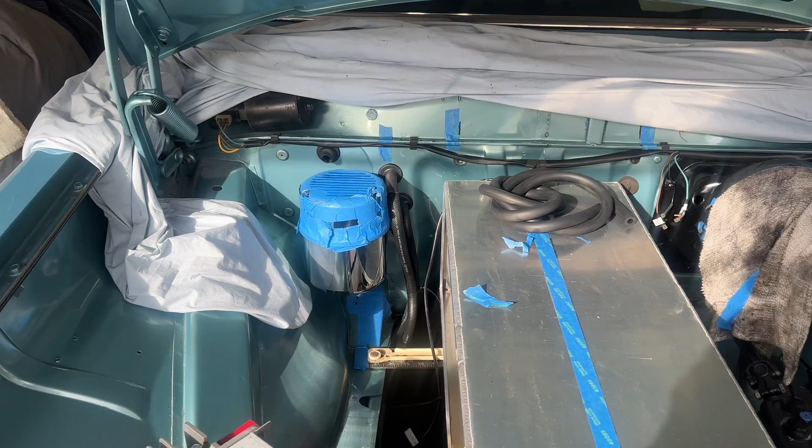So there's that, our two AC lines are there. I had to put a little heat shrink on this AC line because it started to get a kink in it. I'm hoping with the pressure the kinks are less prevalent, but it doesn't like bends because it's a reduced barrier number 10 hose, because this guy is a reduced barrier number 10 fitting. Boo! Or that one's the number 8. Here's the number 10. Boo!

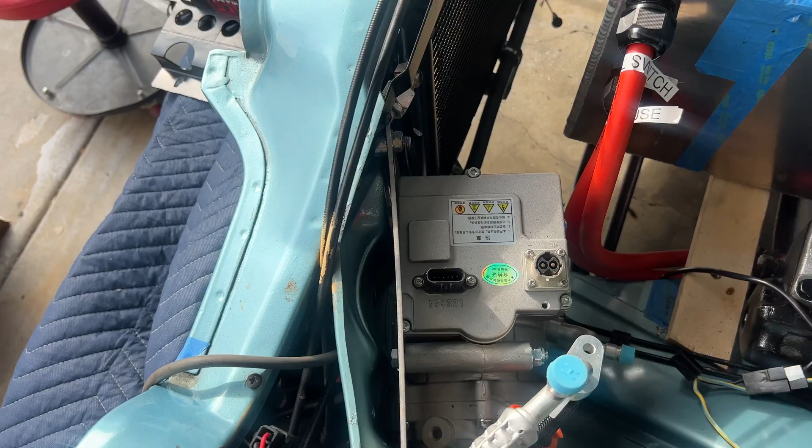AC compressor doesn't really fit there nicely without a huge custom bracket and probably a lot of holes in the frame rail, so I figured this is a better spot for it because it gets a much flatter mount. Just have to make some spacers here before I stick the bolts in them and taper them off. So that was fun. It's like, this is a day of work. It was a little bit less.

But why don't we go inside and we'll look at the contactor box. That's where a lot of days of work have happened. It's getting kind of messy in here, and I think that's a good sign. It means you're sort of making progress.

This is our AC controller. We'll do the wiring for that shortly. The AC lines happen to fit quite nicely. I was really happy with the way that worked, and we have a few lines of cable going around these two AC ports. I'll go ahead and tighten this up, and I think that's it for AC.

And then at the end, when I start doing the vacuum, after all my vacuum is pulled, I can go through with the foam tape and wrap up all the rest of the bits and bobs and make sure it's nice and insulated, because we want our thermostatic expansion valve pipes to be insulated. The valve itself, I think, should stay out and ambient, but it's going to be like up to here.

So inside of the box, we have 3 contactors. Each one's labeled - heater low, heater high, and our AC compressor. Those run the high voltage cabling, which should be orange, but it's very expensive to get orange cabling in this size, so I think these are 14 gauge. I ended up just getting red, and we can wrap them with some orange loom if it's an issue, but it's all high voltage stuff, baby. We got orange zip ties at least, so we can celebrate some labeling.

As far as heater is concerned, I think we might have an overkill on the system, but I know that when it gets freezing, you really want full blast immediately. So this is like the size of one of our heater cores, and this little failer with the doors - like just the windows are down, but the doors are closed. This one might stay open, but I have more than adequate heat here. Although we're not in freezing temperatures, we're just here in Southern California. It'll drop barely below 50.

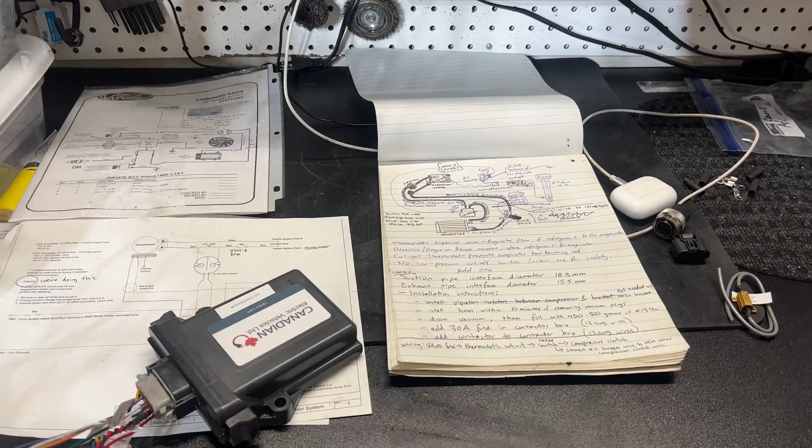A couple hours of figuring out how to do the wiring, and it's finally labeled. So we have about 6 or 7 connections to make here for the Canadian electric vehicles air conditioning system. There are 2 options that they give us, which is really cool. Basically, you can have this guy control the entire circuit for the air conditioning switch - you just need to add a switch and then it runs the whole show. Or you can go with a more original style circuit. So I'm using the OEM AC circuit with its own engagement switch and clutch wire. This way we don't have to run so many wires through the car, and it'll be easier if anybody in the future wants to switch back to the original. This feels less invasive. Things are coming together kind of nicely.

You know, these videos are jumping around based on what component I'm working on, so it's possible you haven't seen me do these. It's possible this comes and goes and is in various states of being attached to things, and that's fine. We're just going component system by component system. Keeps things easier because I make like 5% progress here, 25 on that, 0. It kind of bounces around a lot.

Right now, just if you're curious, the date is January 25th, 2024. We're coming up to the 2-year mark on this. Ooh, let's not hit that, okay?

But yeah, I've got my lines crimped and made. The lengths are where I want them to be. There's a little bit of serviceable length here, so I can get it on a little longer. And I'm gonna wrap this one as well to insulate it a little bit more, because we don't want too much temperature loss from the length that our hidden lines have to run.

Then they head over to the firewall there. The top one is threatening to kink - that's why I have a few zip ties to hold it in place. I'm hoping once the gas is pressurized in there, it'll resist kinking a little bit more. Or maybe I'll add some heavy duty conduit wrap to it to prevent it from kinking additionally. TBD.

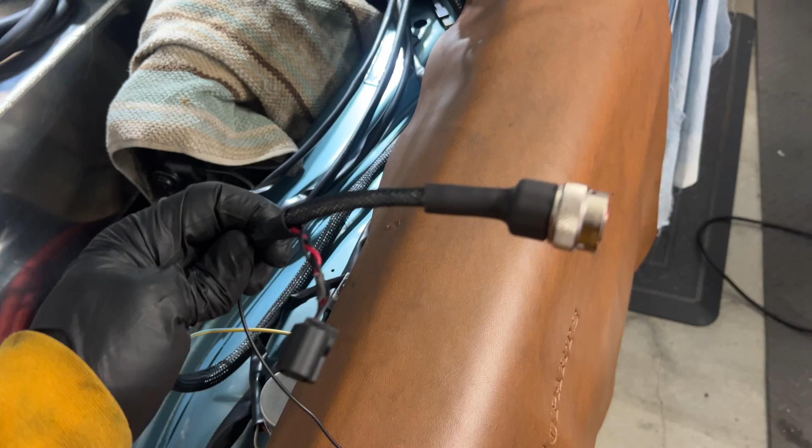I just decided I'm gonna put our contactor, our controller inverter - it's gonna live right up here. It's the best place for it because I need that side open for access to the batteries and all the components. And this side, the wires can just run down and onto the motor, which should be getting put into this car very soon.

A couple of steps along the way, and now we have our connections made for the ends. These little guys are tricky to put in - the pins are so tiny. You really want to hear for that small click. But for the most part, it should be a pretty clean install.

Putting this heat shrink here made it a little bit more water resistant, so I'm happy about that.

I'm going to attach the power box right there, on the side of our heater, underneath the dashboard here. I've made a nice little L bracket and put some holes there. Those two are going to attach through this, and then with the L at the top, I'll be able to attach our feller here. So I'm not putting holes in the body of the car, and I'm putting holes somewhere where there's a nice available spot, since we've already modified a little bit of our heater box. So I feel good about that. Sometimes it's these details that matter.

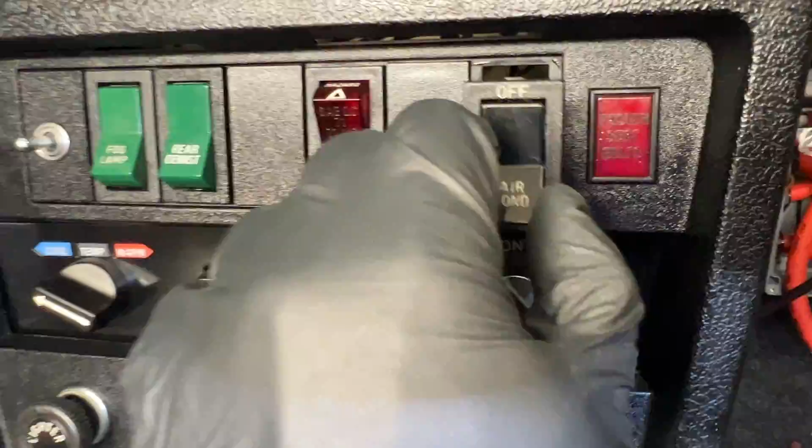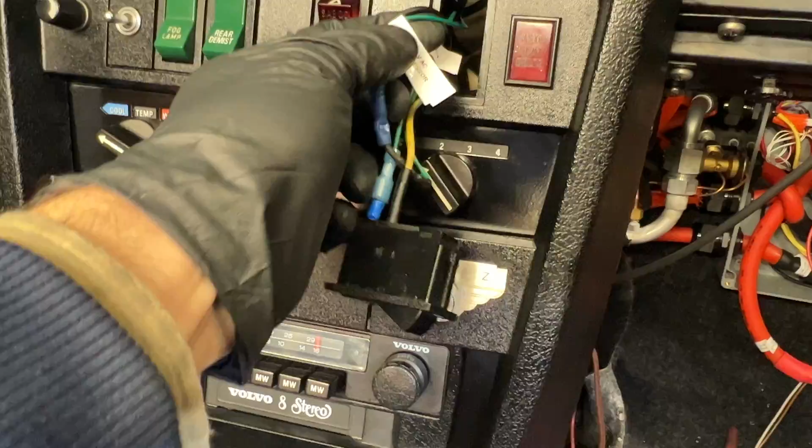The switch here has now been connected to the receiver dryer trinary switch. I've essentially taken the two wires that are green from the trinary switch circuit, which is low and high pressure protection, and I've interrupted the switch here. So if you turn the switch on, it's going to send the signal to the trinary switch, and if the switch says yeah, there's enough pressure in the system, we can turn on the compressor, it'll allow that. It'll send that signal back here, where our second green wire connects to the small green, which is the Canadian EV compressor signal, and the big black wire is the original Volvo compressor clutch switch.

The reason why I have that black wire still connected here is because that is already a harness that's run under the hood, right here. So I can go ahead and use this signal to trigger something like our fan relay. That way it's making good use of an existing wire.

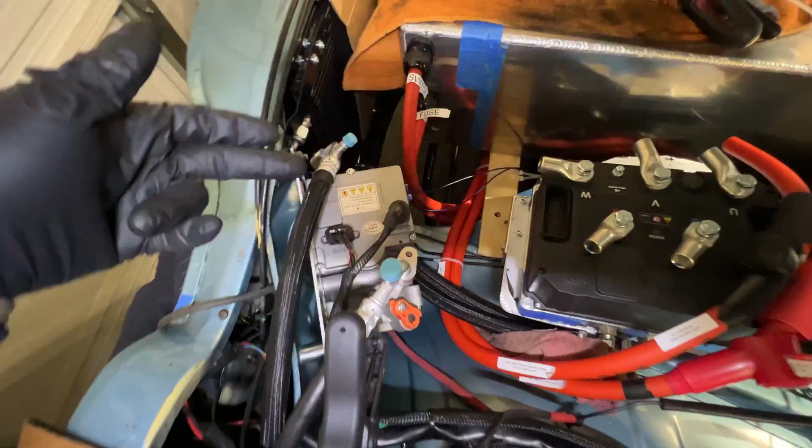A lot of other stuff's happening too, but the other videos will talk about what you're seeing, the controller, the battery boxes, etc. So from this, the high voltage A and B head off into the contactor box. These fat wires are the twisted cable that's just like the 12-volt input and body ground, so it's just grounding off locally here. The trinary switch is living right here in the front with the receiver dryer. It's not ideal to have the receiver dryer in the front. I've seen most of them have it placed over yonder, but I have it where I can fit it. Thankfully the grill does clear because it sits just nicely in the front of everything.

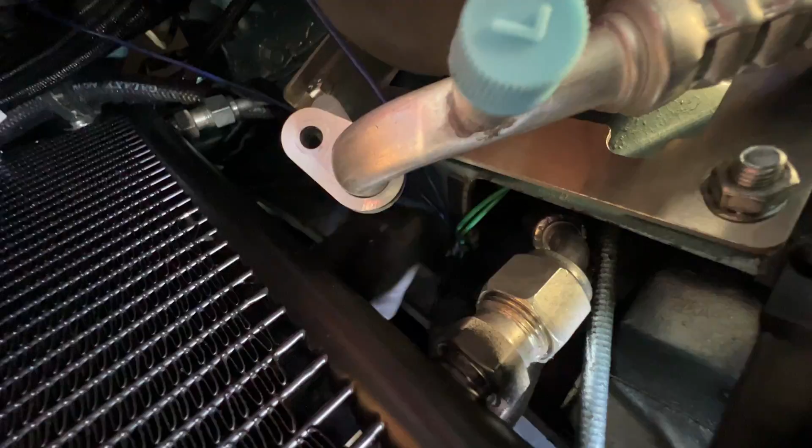From here you can see the green wires, so that's one circuit from the trinary switch. Circuit number 2 from our trinary switch runs off to these wires. I haven't run them or cut them yet. Those are the wires for the fan relay.

Black and green are now attached to our AC clutch, which is my green. The blue wires are just the fan circuit, which says if we have one of our blues grounded somewhere near the condenser, the second blue, once the conditions are met and there is minimum pressure / maximum pressure inside there, it'll send a grounding signal to the fan relay and says okay, you can ground the relay. Then the relay says great, well we've already got 12 volts coming from the ignition and we've got ourselves power to the fan itself.

A couple other ways you could ground the relay is through an adjustable fan in radiator thermostat switch. That's cool. Or a water temperature switch. This one has a 190-degree rating on it.

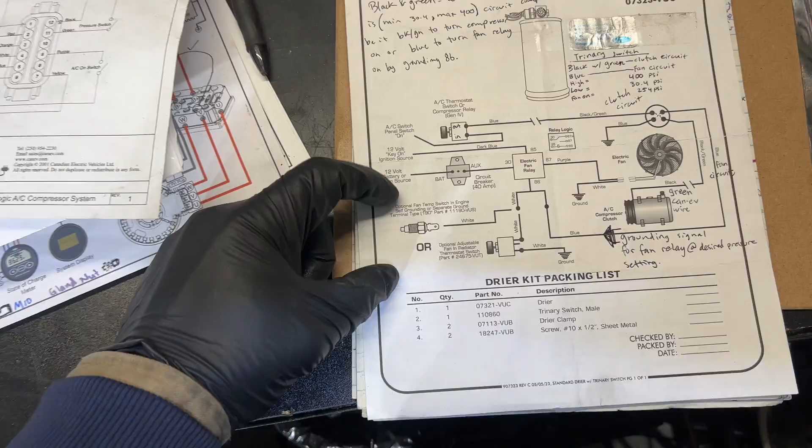The reason that you would want multiple options for grounding instead of just one, meaning this signal, is let's say I'm not running the air conditioning and the engine gets warm, or in our case our motor and our controller, because we do have a water system, gets warm. This will ground first. Even if we have a catastrophic failure of our air conditioning stuff, we have a second ground signal saying we need these fans on even though you're not using air conditioning because our controller is getting up to temp.

We have our hoses run to the controller here, but I'm going to go ahead and maybe tap into the hoses, or I might drill and tap a sensor. I thought there was one already on our chill plate, but essentially we want to get a signal from our controller here so that we can have, or I'll just buy a little thermostatic switch and use that to get a second ground signal to our electric fans. Still haven't sourced the fans. I'm going to work on that, but it's slowly coming together.